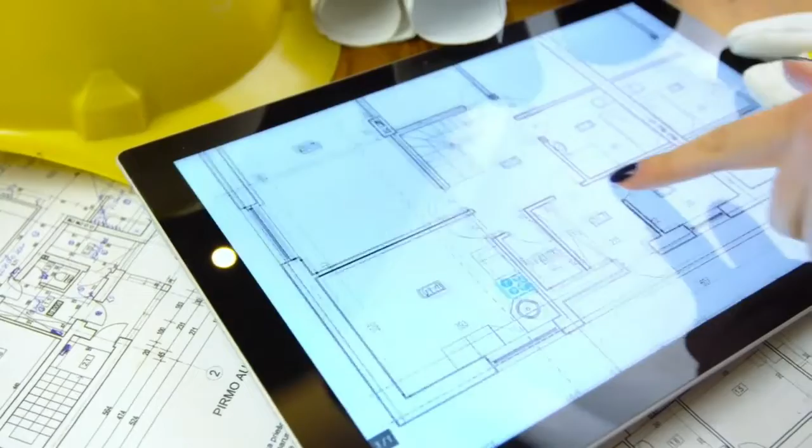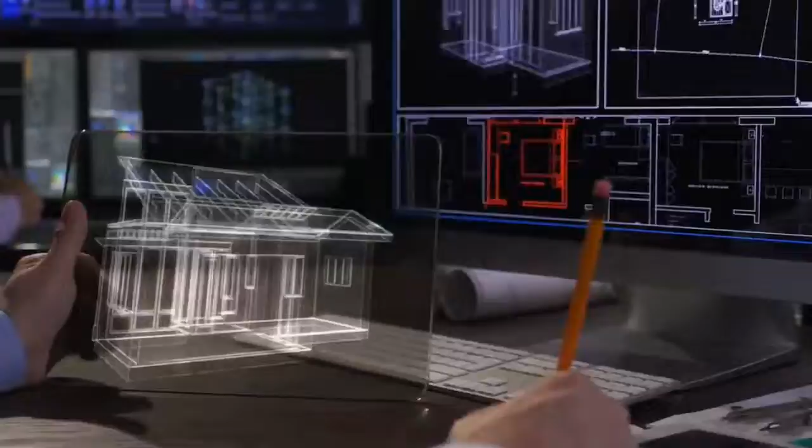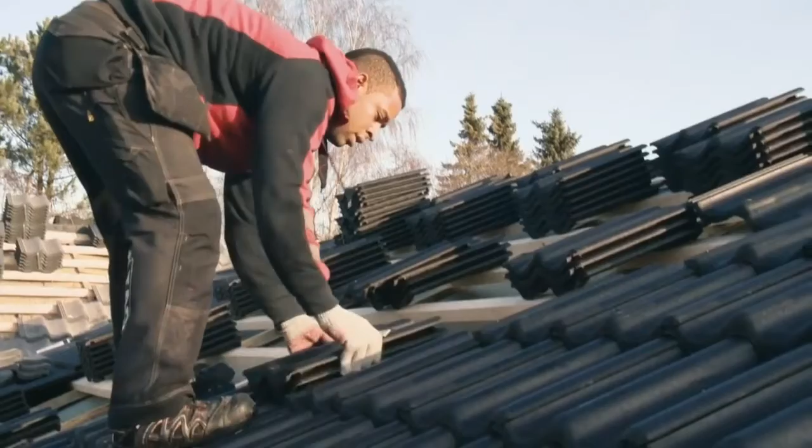The roofing industry has come a long way since the first use of glazed roof tiles. With technology advancement, today the function of the roof is not just limited to providing safe shelter, but also supporting the preservation of natural resources. When it comes to roofing solutions, one name stands out as the long-standing, trusted and innovative provider: BMI. We bring 165 years of experience delivering innovative roofs that create new possibilities for the people who live and work beneath them. BMI is the global leader in roofing solutions, with growing expertise in waterproofing solutions. Headquartered in London, with worldwide presence in 40 countries across 3 continents, this speaks of the global quality standards the brand represents, bringing together some of the biggest and most trusted names in the industry.

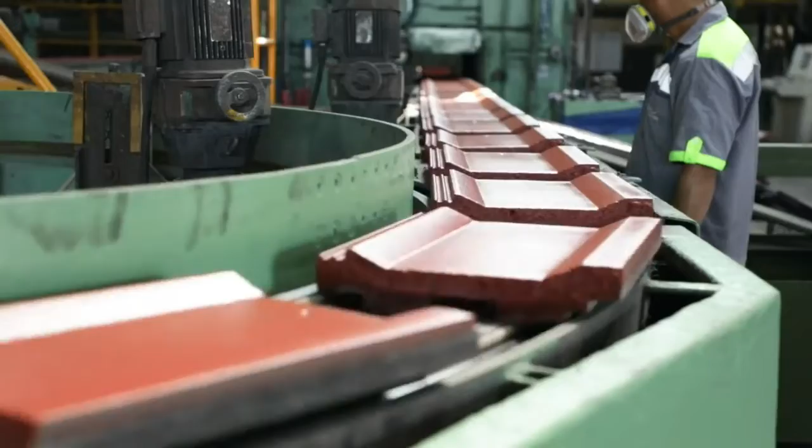In Malaysia, as the market leader with over 50 years of presence in the industry, BMI Malaysia offers a comprehensive range of innovative roof tiles and components, as well as energy-efficient roof systems for homeowners, architects and developers. BMI Malaysia is an MS ISO 9001-2015 certified company, and we continuously innovate to develop and deliver high-quality products and services by leveraging the BMI Group's technical expertise and comprehensive resources - such as the largest sales network which maximizes reach to customers, the biggest production capacity in the country with state-of-the-art facilities and processes, and the widest distribution network which ensures efficient and timely delivery of products and services. We bring the expertise and insight to shape the future of the roofing industry. Our people make the difference - dedicated teams and market experts assist you with design and project solutions, technical advice and product information.

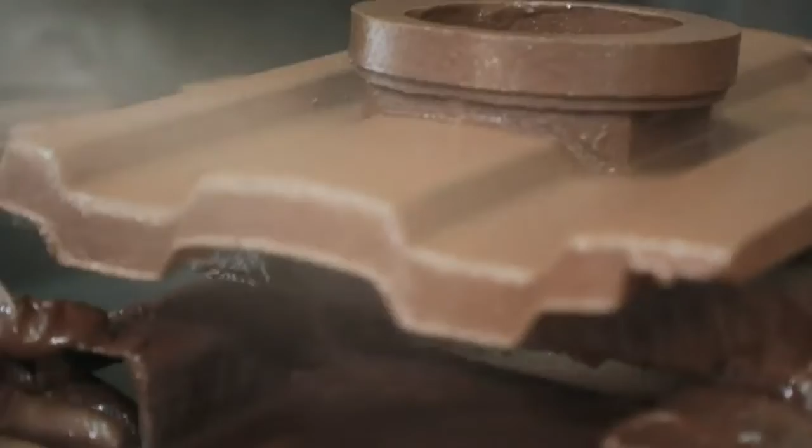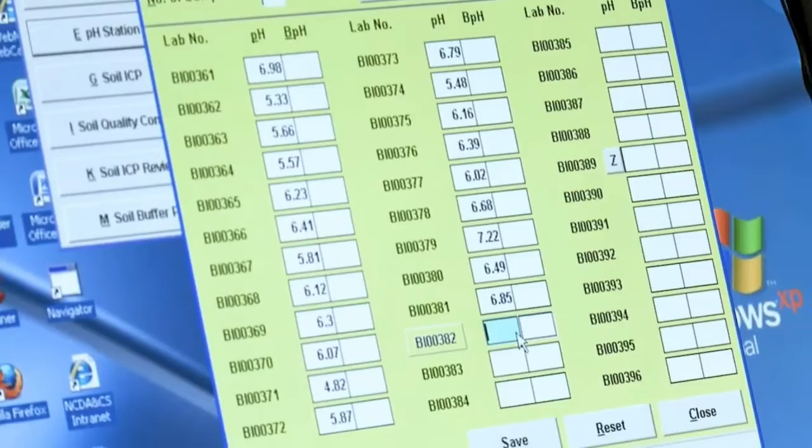On the other hand, BMI Academy offers a number of training sessions for different target groups to ensure that our personnel are constantly updated with technical knowledge and skills to meet quality goals. We also strive to better understand our customers' needs and develop new and optimized products based on insights from research on the markets, customers, architectural trends, processes and environmental performance.

Before production, a trial product undergoes extensive testing procedures to validate that it conforms to national and international standards, durability against weather, as well as a series of stringent quality requirements. BMI, it's never just a roof.

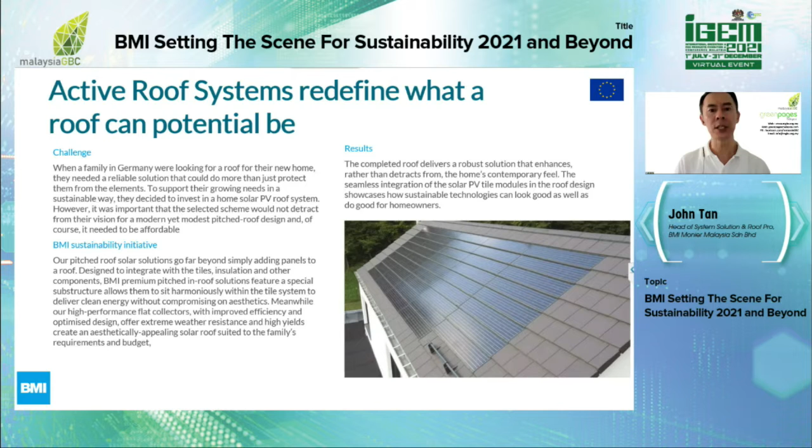In Sweden, we have a collaboration on a green roof guideline. Just now I shared with you about flat roof. So with a flat roof, you can use certain technology to turn it into a green roof by incorporating certain expertise and correct design. That's what we have been doing in Europe as well, and it has been very well received by the industry and roofing community. So what we do is work with a certain university to come out with the proper irrigation, especially for grass, to make sure it is very well taken care of.

Because if you want to maintain a very nice green roof, you have to make sure the grass is always green. To ensure that, you must make sure there's enough water, moisture, sunlight, etc. But you also want to make sure these are all regulated so it won't become a problem in terms of leakages. So we have done that with either thermoplastic polyolefin or PVC as a solution, and on top of it we have incorporated certain technology and know-how to ensure you can put grass on your rooftop. And of course, if you put grass on the rooftop, your house will be even cooler. This is what we are doing right now.

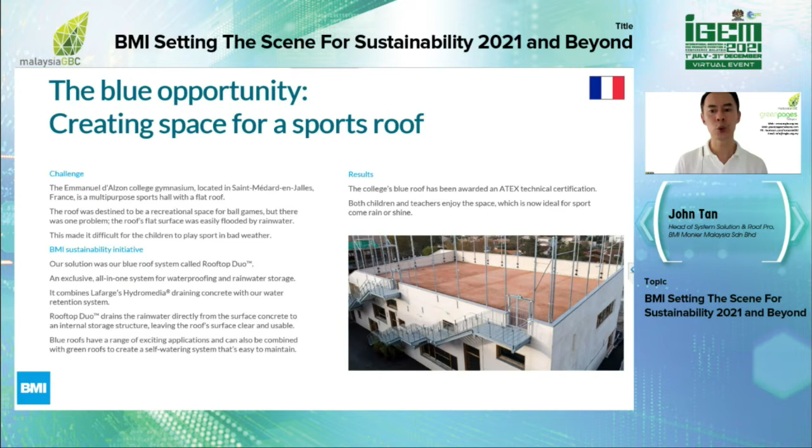So on Planet - for example in China, we have transitioned from solvent-based coating to water-based coating. In Malaysia, we have done that to many of our products as well. One of the criteria in China for many of our plants - as you know we also have concrete plants in China - the China government has been very strict over the last 5 years, coming up with many different types of regulations to ensure there is less and less pollutant generated by the industry.

So one of the criteria or challenges we face is about the volatile organic compound. In the production of our concrete tiles, if we were to use solvent, it actually pollutes the air. Last time when our plants were built, they were built very far away from civilization, but as cities started to grow, residential areas started to encroach, coming nearer and nearer to our plants. This became a problem because with solvent-based concrete tiles, when they spray this coating onto the tiles, the smell actually goes around.

So it's actually the community, people that live quite close to our plant, that started to complain. And therefore, the government has come up with certain regulations to ensure that not only BMI, but also other industries are regulated. So in many parts of China, what we do is we change this solvent-based coating into water-based coating.

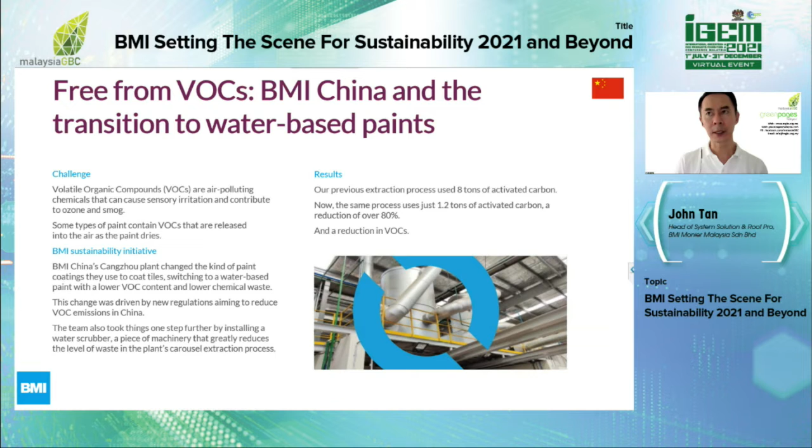So more and more of our products are basically water-based right now, water-based coating. And water-based coating is even more long-lasting. Usually water-based coating will provide a matte color, right? Matte color. It's not a glaze color, it's a matte color.

As you know, BMI is a very big company. We are around 6.5 billion US dollar in sales. So we have many offices all over the world. As you know, if you were to put in place a very good IT infrastructure, it actually uses a lot of energy. And we saw that as an issue.

So what we did is we brought in a consultant to study this, to ensure that it's sustainable. At the end of the day, we only chose two locations in the world where we can put our data center with no additional power consumption. So we have done that as well. We have consolidated everything, our database, our data center, into two physical sites in the world. I can't tell you where, but anyway, it is only two sites.

And what we are trying to do is reduce 2.3 million tons of CO2 every year. Because if you only have two physical centers for IT infrastructure, you reduce energy consumption and you also reduce the CO2 emission into the environment. And that is the right thing to do, right? That's what we are doing.

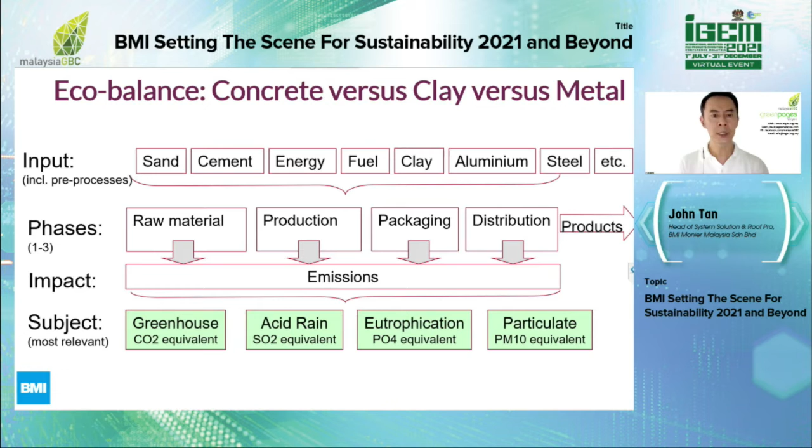And these are the processes that involve from cradle to grave - from the iron ore, from the mining, from concrete, from clay, everything. So it goes through different phases, and finally you have the emission, that is the greenhouse effect, acid rain, eutrophication, as well as particulate.

I'm running out of time, so I'll try to go faster. So under this research, you can see there's clay roof, concrete roof and metal roofing. What I highlighted to you is this: the CO2 emission from clay roofing is the worst among all. But in terms of clay, it generated 3,404 kilogram of CO2 emission for 160 square meter of roof. Concrete is the least, 1,542 kilogram. And metal roofing is at 3,295.

So among the three, actually clay is the worst because you need to use a lot of gas to fire the clay. So when you fire the clay, obviously you need a lot of energy - that's why clay actually uses the most. And for iron ore, you need to melt it before you fabricate, before you roll out the metal sheet. Therefore, you use a lot of energy in terms of production of metal roofing sheet as well. So among the three, of course, the worst is clay, and the best is actually concrete.

In terms of energy, you can see the usage - back to the earlier slides. From this, what we learn is that because we use so much energy in terms of production of clay, what we do is that from this study, we actually draw the heat that when we fire the clay tiles into the kiln, the heat that we retrieve from the kiln itself, we use it back at the pre-kiln production processes.

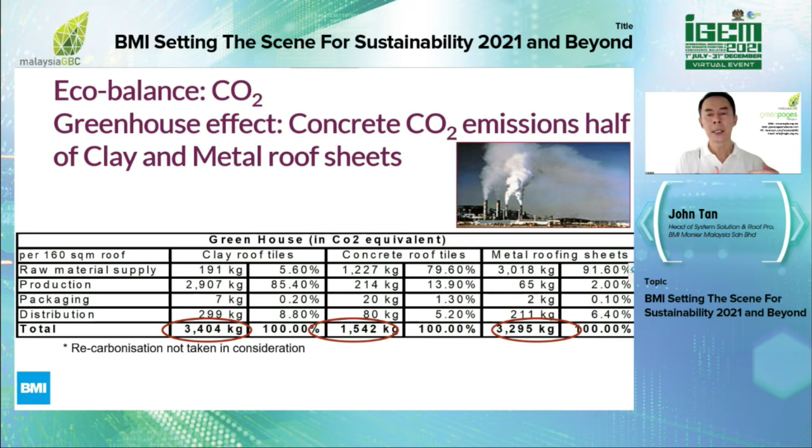So when we do that, we reduce the number of CO2 emissions - that's what we'll be doing. So from that learning itself, we learn how to utilize our so-called greenhouse effect. We minimize it and we use it for our better purposes.

Okay, next. So in terms of energy, you can see that metal roofing uses the most energy - they are using like 55,268 megajoules for the production of metal roofing. Clay tiles is 49,000 and concrete is the least, around 10,813 megajoules only. So in case of metal roofing sheets, almost all the primary energy demand is used for supplying raw material, hence for the production of steel and aluminum sheets.

So the fuel that we use for clay drying, the electricity utilization is because of that. Clay is prepared in such a way that's why they use a lot of energy as well. Whereas in terms of concrete, it is the least usage of energy in terms of cement production.

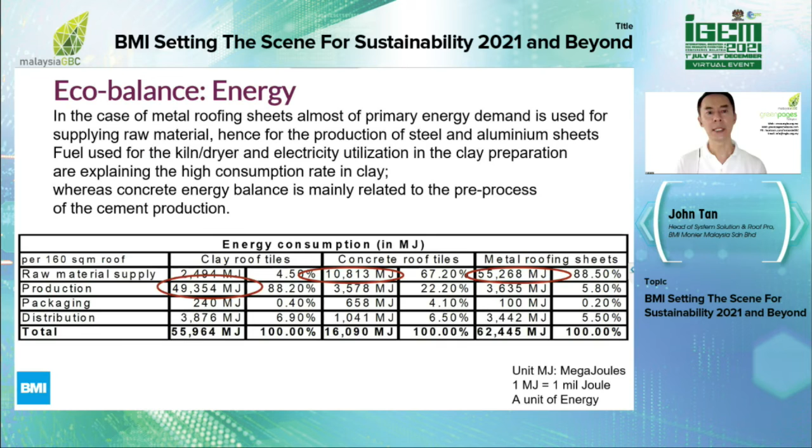All right, next. So in terms of SO2, we also realized that metal roofing causes a lot of pollution, meaning they emit a lot of sulfur dioxide. Sulfur dioxide, when it mixes with water in the environment, becomes acidic - it becomes sulfuric acid. So sulfuric acid over time will cause the forest to die, because when your environment becomes more and more acidic, it will affect the trees, the environment around the area. So if you have an iron ore plant or metal roofing plant nearby, it will cause a lot of problem to the environment.

You can see that metal roofing emitted 50.26 kilograms of this SO2 into the environment, whereas concrete is the least, at 4.5. Next.

Eutrophication talks about the potential of these nutrients, such as phosphorus, in this case. They are essential for the planet as well as plants and animals, but too much of it will cause problems, because when you have a metal roofing iron ore company nearby, it releases around 8.93 kilogram for 160 meter of roof.

So it will cause issues when you have a lot of phosphorus in the environment caused by the iron ore. It acts like a fertilizer because it causes the increase of algae in the lake, and that causes overpopulation of the algae. When the algae die, it increases the amount of bacteria in the lake. When the bacteria increases, it needs a lot of oxygen. When the oxygen is reduced in the lake, the fish will die off. So one good thing will cause another implication as well.

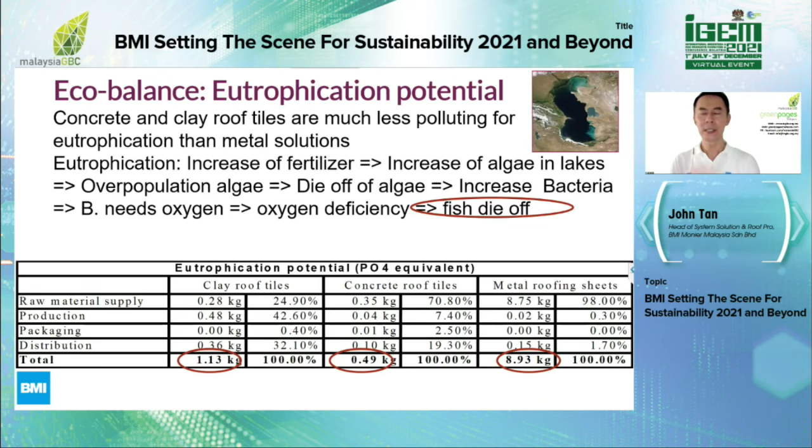So in summary, what I want to share is this: the analysis of the eco-balance study that we carried out shows that it is better to use concrete tiles, and concrete tiles are better than clay, but clay itself performs better than metal roofing. In the case of atmospheric mercury emission, concrete roof tile is worse, but that is only for cement production. The key thing I want to share with you is that what we can draw from this environmental impact assessment is that concrete roof tiles are much superior to clay roof tiles, which are better than metal roofing sheets. This is the summary.

All right, with that, I end my session. Thank you.

Any questions? Thank you, John, for the informative insight on BMI and sustainability. I hope all of you understand because I was going like a train. My apologies, because I was only given 45 minutes.